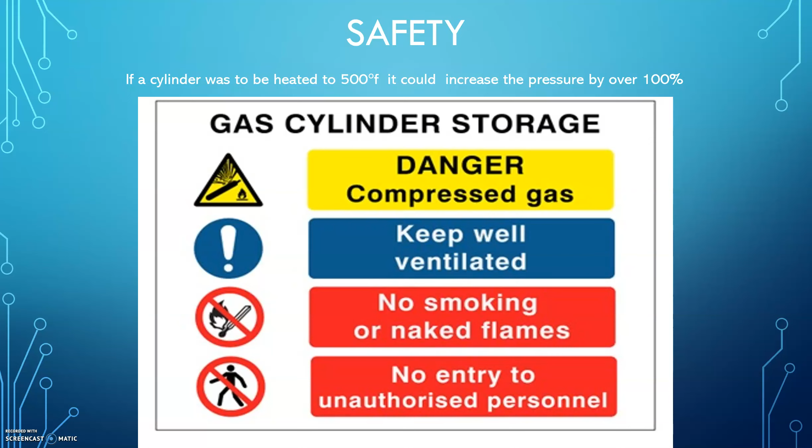When cylinders for welding and cutting are being used, it is preferred to store them in shaded areas out of direct sunlight and away from hot work. As the temperature in the area increases, the cylinder pressure will rise. If a cylinder was heated to 500 degrees Fahrenheit, it could increase the cylinder pressure by over 100%.

When using carbon dioxide as a shielding gas, high arc energy can break the gas down into carbon monoxide. Not only is this toxic to your health, it affects welding by allowing small amounts of atmosphere into the weld area. This is why most wires designed to be used with CO2 have additional deoxidizers to counteract the gas loss. And for all you close welders out there, back your head out of the smoke to reduce exposure.

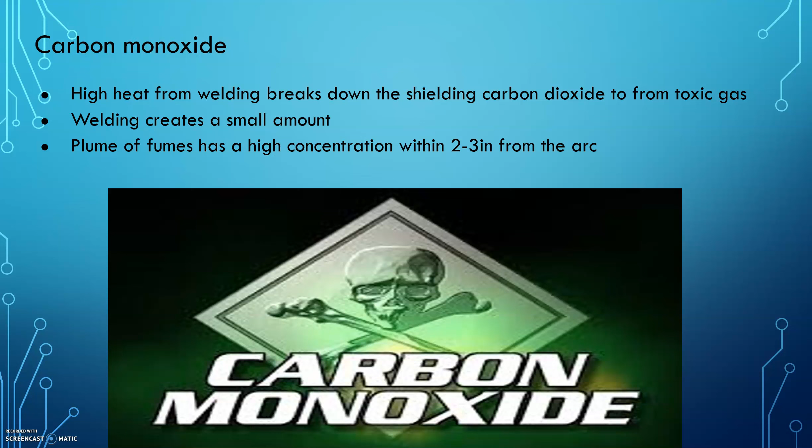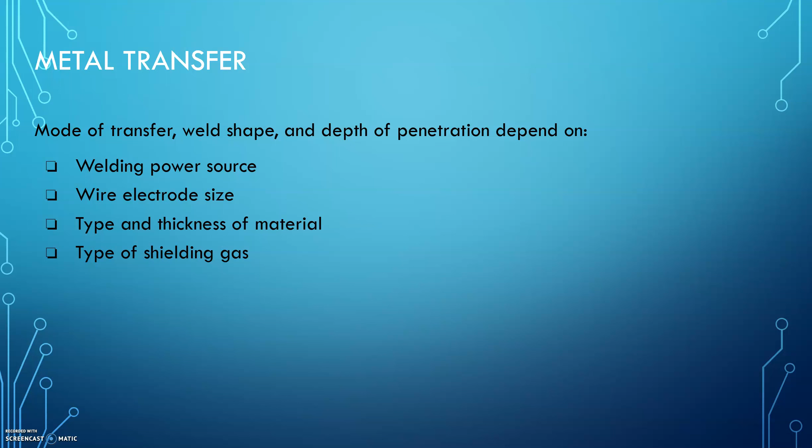Mode of metal transfer depends on power supply, filler wire type and size, material thickness and composition, and shielding gas being used. At lower settings, short circuit metal transfer occurs: filler wire contacts the base metal, current rises, and it short circuits, pinching off a drop of molten weld metal. This process repeats continually from 20 to 200 times per second.

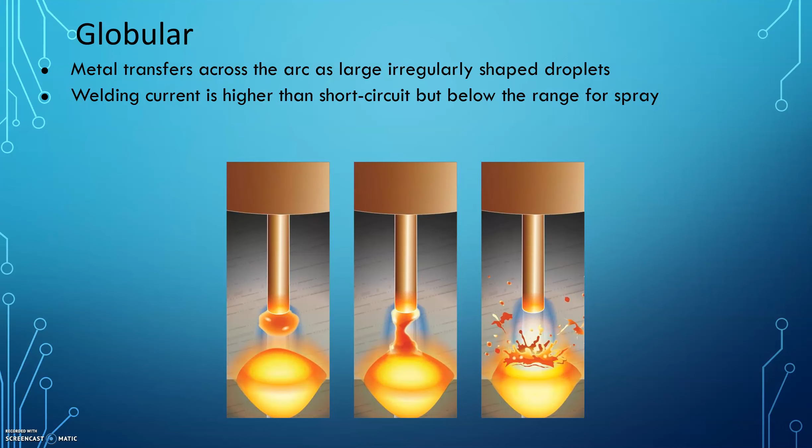As current and voltage increase past short circuit, globular transfer is produced. The metal droplets are gravity fed across the arc. The molten droplets are usually larger than the wire diameter, which can cause problems with spatter.

As settings are increased on reverse polarity with at least 80% argon, the molten droplets transition from being big and irregular to droplets that are smaller than the wire diameter and crossing the arc at a high velocity.

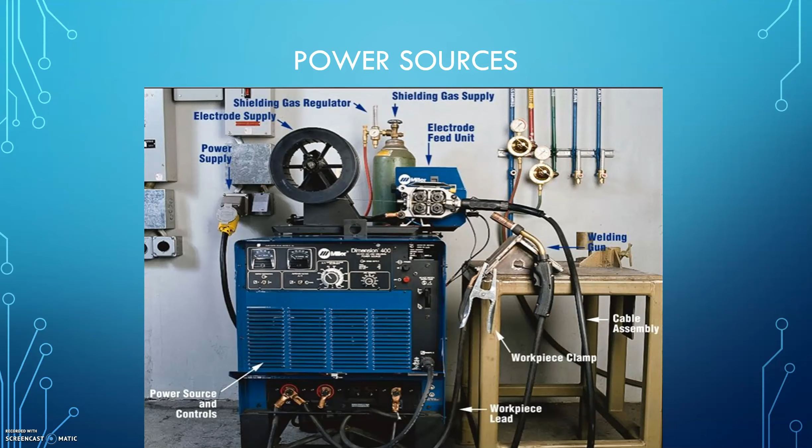A little review on need-to-know power source information. Direct current, constant voltage power sources are used for wire processes and are paired with a constant speed wire feeder. The volt-amp curve is relatively flat compared to constant current power sources. And a reminder that constant current power uses a variable speed wire feeder.

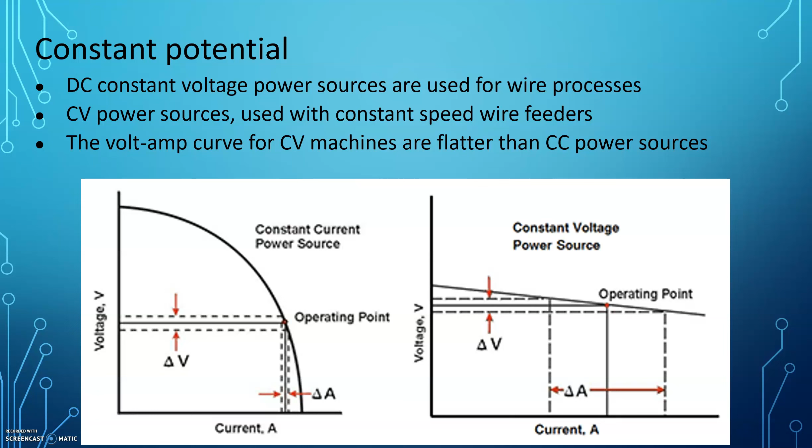A constant voltage power source is self-correcting in arc length by affecting the amperage. As you get closer to the work, amperage increases to help burn the wire faster. As you get farther away, the system reduces amperage to control the slower burn-off rate of the wire.

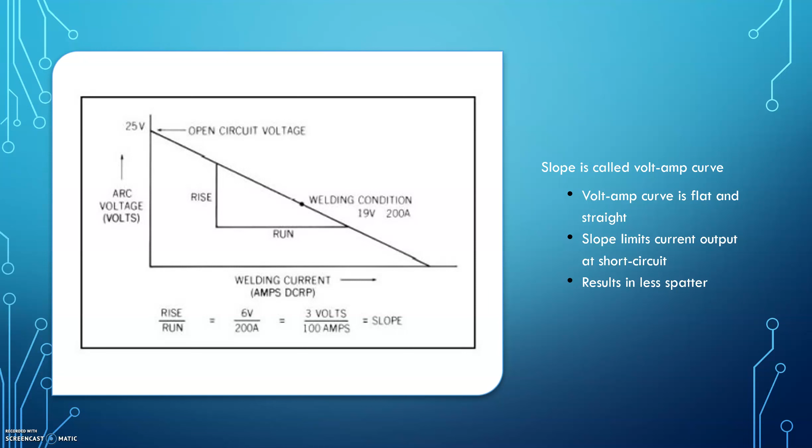The voltage drop over 100 amps is calculated as slope. This reduces spatter by limiting high current surges with short circuit transfer. This is a reference to the volt-amp curve and the relationship between volts and amps. A few notes.

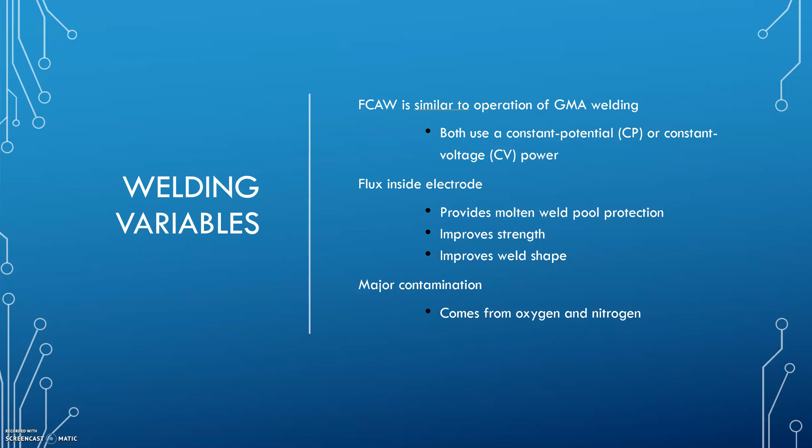Variables for flux core: the power source and wire feeder are the same as gas metal arc welding. The flux inside the tubular electrode helps strengthen, protect, and improve the shape of the weld. And the major source of contamination is atmosphere.

Flux core has calcium, potassium, silicon, or sodium added, which are similar to the slag formers used in low hydrogen electrodes. Slag slows the cooling rate, protects the cooling weld from oxidation, and improves weld bead shape.

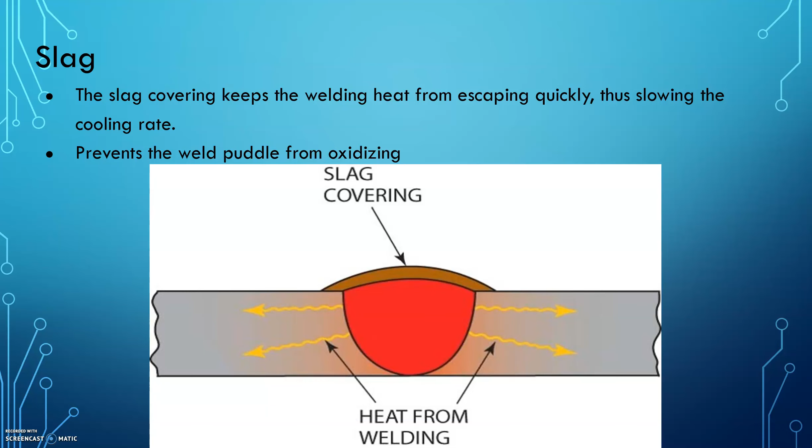Here we have the three main variables. Pre-selected is all about selecting your wire type and everything that goes with it, roll type, gas, and whatnot. Primary adjustable is setting your machine, voltage and amperage. And secondary adjustable is the welder's skill to lay a decent weld, which is most important.

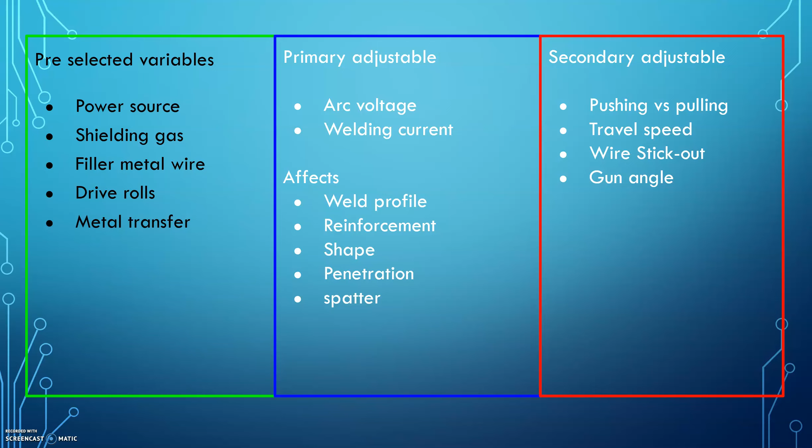If your stick out is too close, you can snag your nozzle in the weld or vaporize the deoxidizers in the wire and get worm tracks. If your stick out is too great, you decrease amperage and lose gas coverage. If there's slag, you drag, also known as the backhand technique, and welding too fast has its own issues as well.

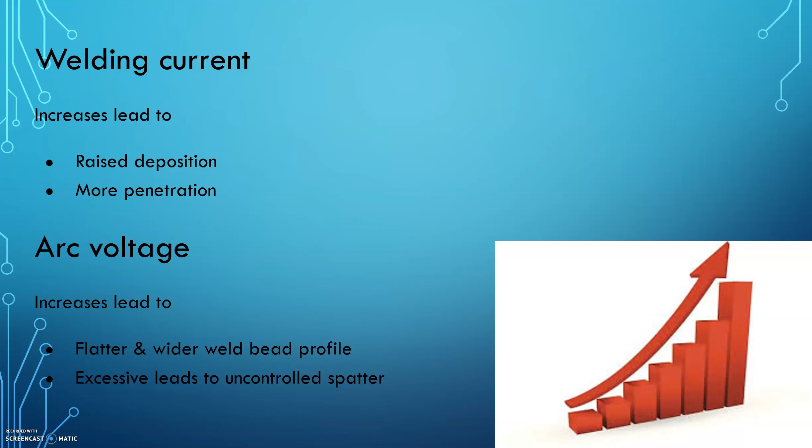Welding current is directly related to wire feed speed. Increasing current puts the wire closer to the base metal, which increases deposition and penetration. Arc voltage is adjusted on the machine. Increases in volts will make a flatter, wider weld bead, and too much volts creates an uncontrolled arc length, leading to excessive spatter.

Pushing versus pulling, also known as forehand and backhand welding. You get less penetration when pushing, and a flatter weld bead profile. Pulling increases penetration and builds up more metal, giving you a higher, narrower weld bead. One thing not talked about much is perpendicular welding and its benefits from both forehand and backhand.

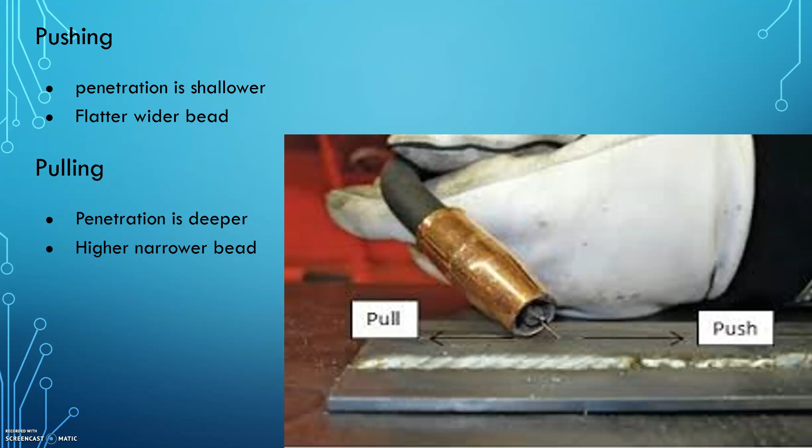The contact tip is most important because it transfers all the power to the wire. If it gets worn, you get problems. Sometimes if it's worn too much, the wire will jump around and arc out inside, tack welding itself inside the nozzle and then bird caging on you. Always make sure the wire is centered in the nozzle. This will keep the wire in the shielding gas zone. A tapered nozzle provides better weld visibility, and nozzle size depends on current levels.

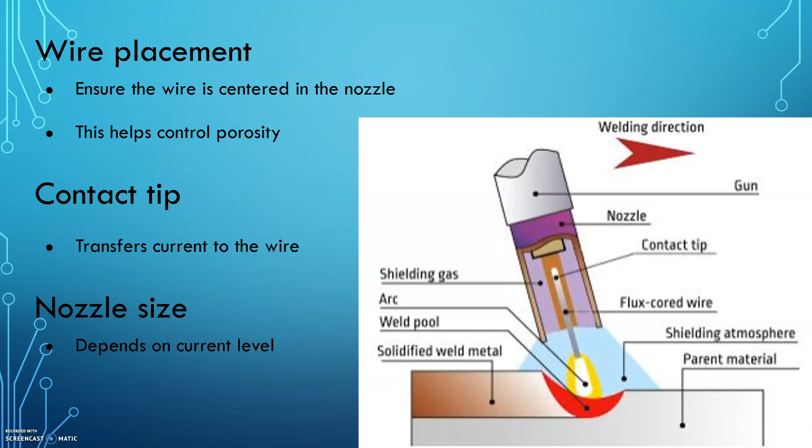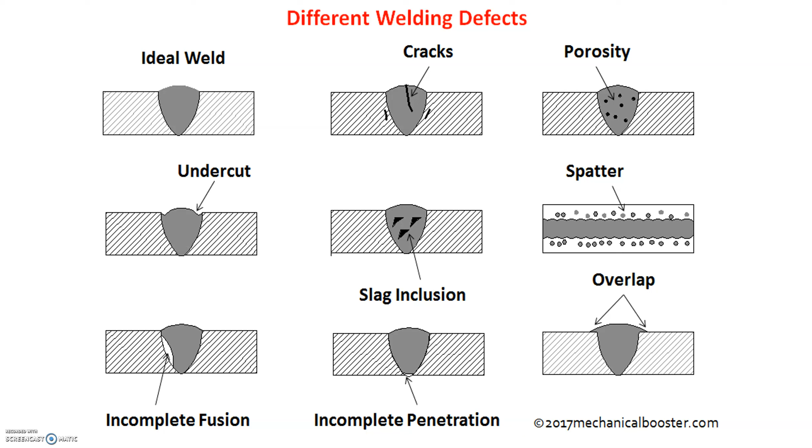A few welding defect corrections: incomplete penetration, primary cause is not enough current or wire feed speed. For electrode stubbing, you've got too much wire, so decrease the wire feed speed. Worm tracks come from tip-to-work distance being too close, or shielding gas flow rates too high.

A few more notes here for you. Pause as you need to.

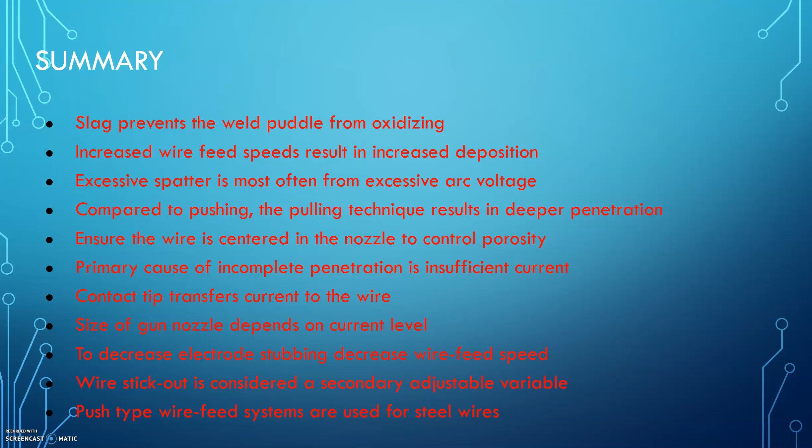Shielding gases: CO2 is the least expensive and only reactive gas used on its own, without the addition of argon, for welding. Low carbon and low alloy steels utilize this gas. Since CO2 reacts with the weld, creating more heat energy, at higher current levels metal transfer is affected, making the transfer of metal erratic and causing lots of spatter. The bottom two-thirds of a carbon dioxide cylinder is liquid. If not changed out at 150 psi, there is a chance of drawing liquid through the regulator and freezing it up.

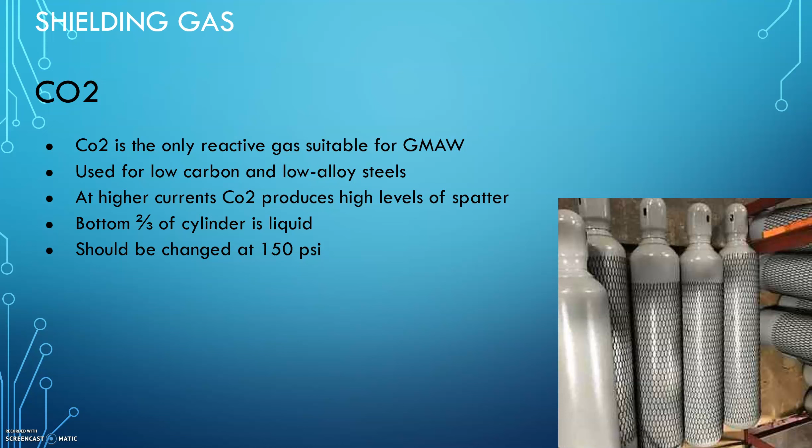Argon is the most commonly used shielding gas. It's a great base for many gas mixtures. This gas is inert and will not combine with materials in the weld zone. It is widely known for its arc stability characteristics.

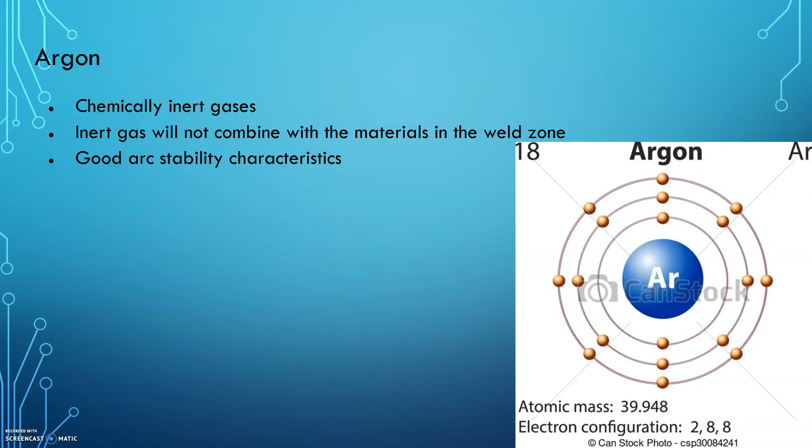A few more notes here. Moving on to filler wires.

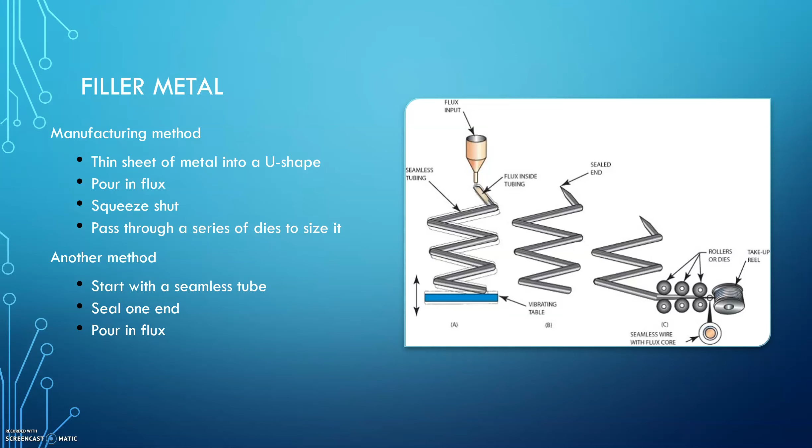Flux core electrodes are designed to meet industry standards. Most are machine made by pouring flux into a U-shaped sheet, then squeezing the sheet shut and passing it through a series of dies to get the desired size of wire.

Two main types of flux are rutile and basic. Rutile is also known as titanium dioxide, and basic flux is also known as low hydrogen. Rutile designed electrodes are great over a wide current range, and all position weldability makes it more welder friendly. A basic electrode has great mechanical properties, but must be kept in close current ranges and does not handle out of position welding too well.

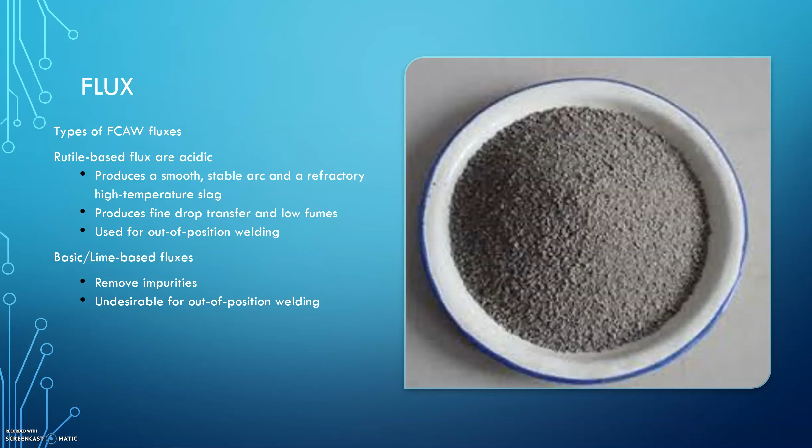Here is a flux core electrode classification example. E is electrode, 7 indicates tensile strength, but can be either CSA or AWS. Next is the position designator. T indicates the wire is tubular, filled with flux. And 10 is current, polarity, and slag system.

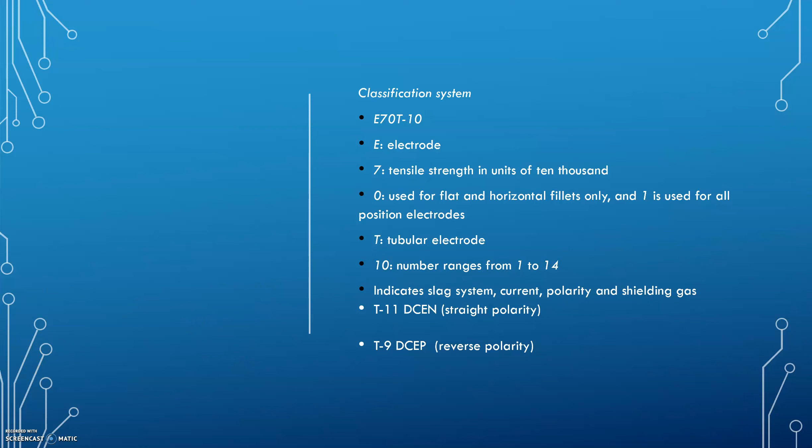A shielding gas indicator can follow the slag system. M is a mixed gas, C is 100% carbon dioxide, and CH, beyond that, would be controlled hydrogen, which reduces moisture content in the weld metal.

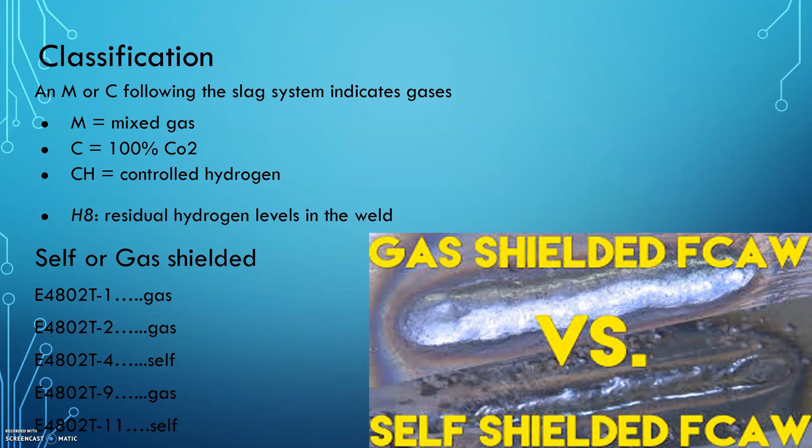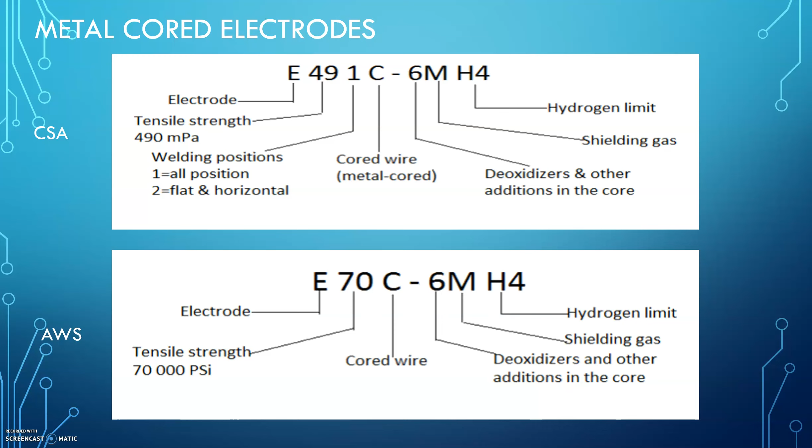Bonus for Red Seal prep: metal cored electrodes are quite similar to flux core, except that they have a C indicating it is a cored wire with metal powder and no fluxing ingredients. Without any flux or slag formers in the wire, there's no slag to remove on these welds. Usually an argon-rich gas mixture is preferred, and you weld this stuff pretty hot, at high current levels.

Quick summary here. The next posted slide is short, but will cover the hard facing materials in your P9 flux core arc welding module.